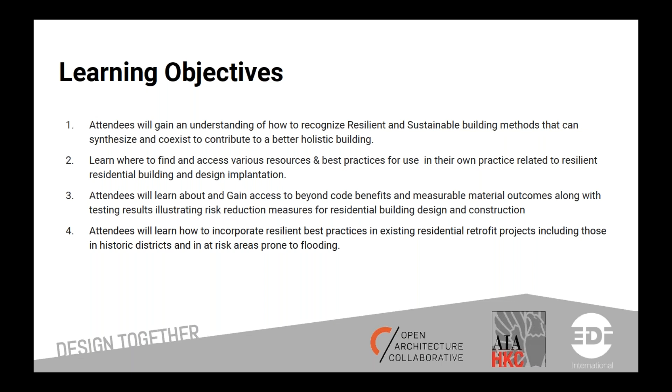Quite a resume. Today's learning objectives: attendees will gain an understanding of how to recognize resilient and sustainable building methods that can synthesize and coexist to contribute to a better holistic building. We will learn where to find and access various resources and best practices for use in their own practice related to resilient residential building and design implementation. Attendees will also learn about and gain access to beyond-code benefits and measurable material outcomes, along with testing results illustrating risk reduction measures for residential building design and construction. And attendees will learn how to incorporate resilient best practices in existing residential retrofit projects, including those in historic districts and in risk areas prone to flooding.

Being in Boston, like a lot of our cities and New York, we can all relate to this. In our course description today, architects are being asked to understand where and how to build better in the face of mass migration, population growth, resource stress, and associated risk posed by natural disasters and climate risk. The AIA and its members are at the forefront of addressing these issues, highlighted by a commitment to the New Urban Agenda that aims to provide quality housing to people and communities around the world. Here in the US, we are coming to grips with the transformation of communities and the way we build to ensure the health, safety, and welfare for all. In this webinar, Illya will take you through a series of housing projects that directly address risk through resilient adaptation and beyond-code building practices. He will introduce several relevant resources covering residential construction and retrofit to achieve resilient building design and benefits to the stakeholders.

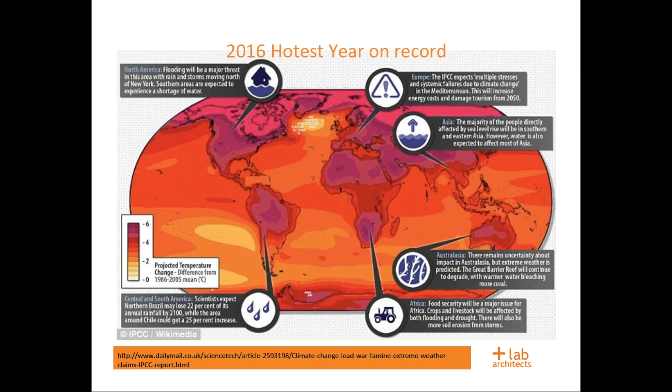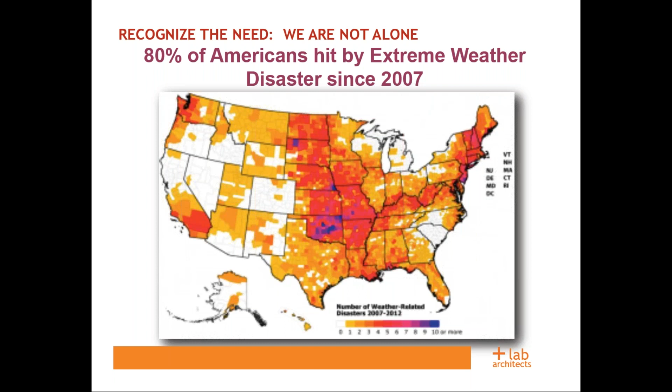So I'd like to start off with a few issues at hand. It's really important that we set the framework for what we're doing. Some of those issues are that the world is getting a lot hotter. Last year was the hottest year on record, and no doubt this year we'll probably break those records. But that means more flooding, more heat, more issues than we've ever had before. In fact, in the United States, 80% of Americans have been hit by extreme weather since 2007. And if we took a look at just last year, 2016, that was the most billion-dollar disasters in U.S. history, coming in second only to, I believe, 2011.

If we take a look at some of the other issues at hand, some of it has to do with rapid urbanization. In 2010, half the world lived in urban areas, and by 2050, 70% of folks are going to live in urban areas.

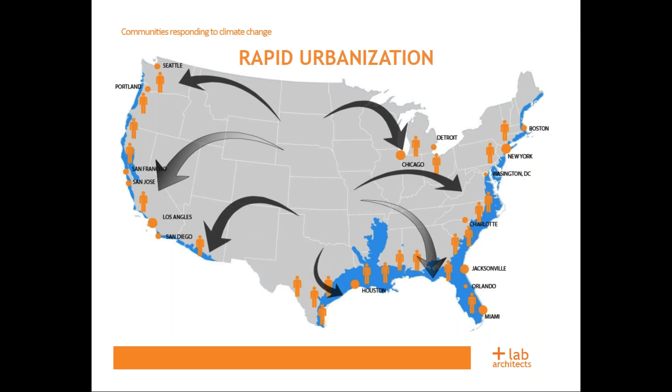That's an enormous amount of the world population, and that's only going to get worse. In fact, 3 out of every 4 jobs happen to be dependent on water globally, meaning 75% of all labor in the world is dependent on water. Too much water, too little water, sometimes we get caught up in a little bit too much.

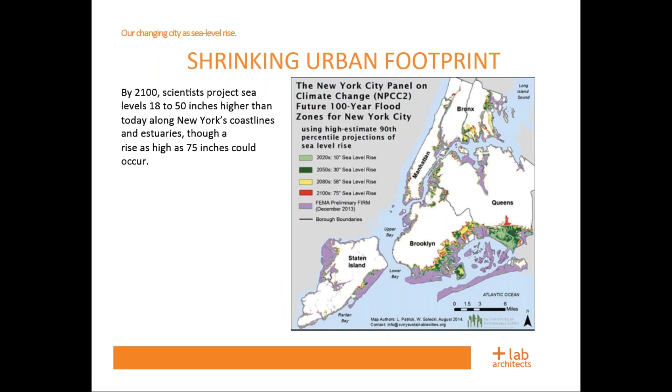With New York City, where I live in Brooklyn, a lot of the work being done is around predictions put forth by Sandy, that we're going to be looking at almost 6 feet of sea level rise over the next century, and how do you prepare for that? The fact is, over the last 30 years, the world has lost 2.5 million people to natural disasters at the cost of $4 trillion.

If we look at the year of Sandy in 2012, that year just over 61 million people were displaced worldwide from natural and man-made disasters. We hear a lot about the crisis going on around the world today with population migration. That's been happening for years and years, and it will continue to happen. In fact, every minute, 24 people are displaced around the world by natural and man-made disasters.

What we really need to do is project forward to the years 2050 and 2100 and ask ourselves what the future will hold. If we take a look at global migration and growth of cities combined, there's an estimated 200 million people in need by 2050 on an annual basis. Looking forward to 2100, that estimate goes up to 550 million people on an annual basis being displaced by natural and man-made disasters.

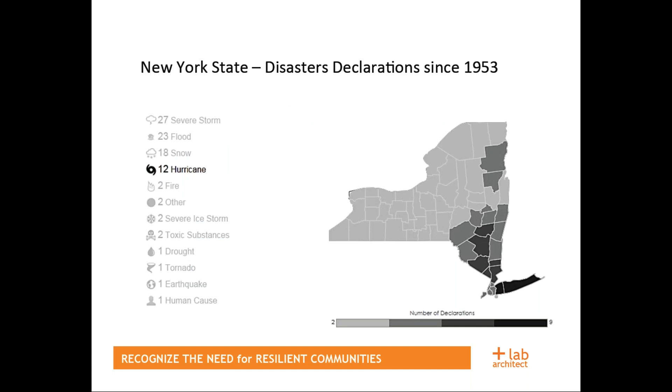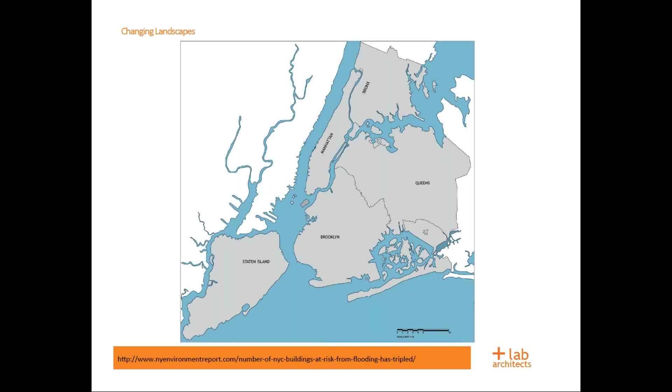Now, if we look at New York City proper, the 5 boroughs, we look at our current coastline but project forward to 2100. If you look at that erosion of coastline based on daily flooding as well as sea level rise, that equates to about 12 square miles of land lost. This is a highly dense urban environment, similar to Boston and all of the cities along the coast, Miami, all of these places.

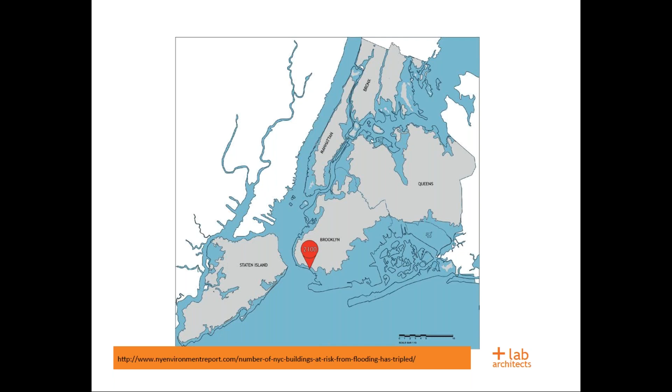So what does 12 square miles mean for New York City? It means about 400,000 people who currently live there can no longer live in those locations, or we're going to have to do a lot of extreme work to keep them there. Aside from those 400,000 folks, that area of land turns out to be quite a large chunk of the city if you gather it together and remove it from the geography at play.

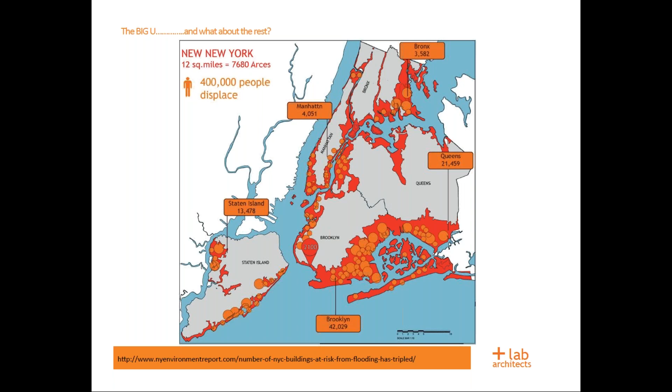As a side note, 51 square miles of New York City, the 5 boroughs, was hit by Hurricane Sandy. So we've seen this before, we've seen it even worse. But this is on a daily basis based on climate change numbers.

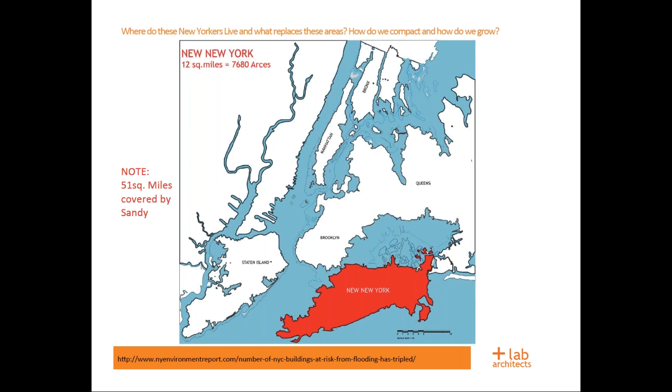It's 12 square miles, and within those 12 square miles, aside from those 400,000 residents, it includes 80 schools, 74 daycare centers, 28 public housing buildings that house 61,000 people alone, other residential facilities with social services, 18 hospitals, 9 senior centers, and 4 wastewater treatment plants.

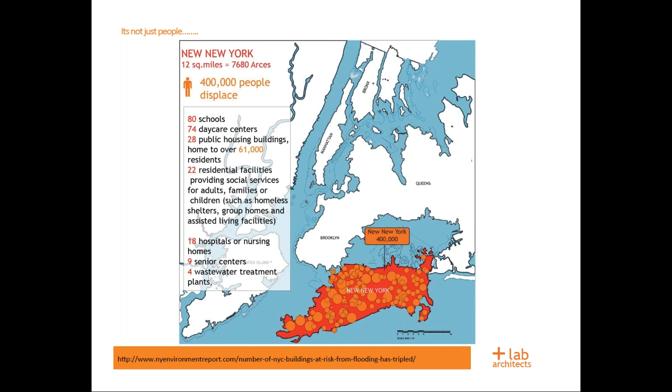So we are talking about housing today, but we're also talking about everything that supports the infrastructure of what makes a community and housing work in those locations, and with the new urban agenda, a walkable city.

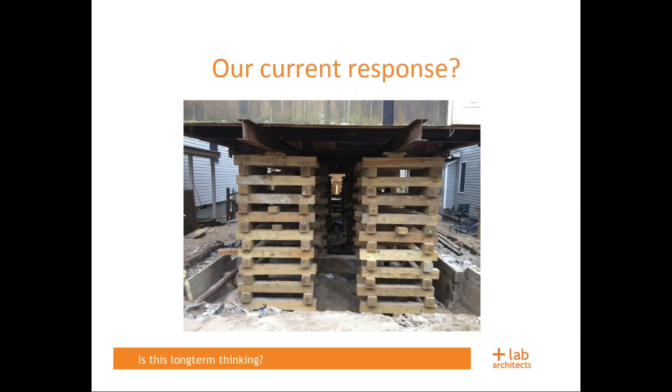So is this our current response? This is what we're at now. Does this look like long-term thinking? We need to recognize a couple of things, the consequences of uncoordinated action. When I'm working on a house, I need to really understand what the neighbors are doing, what's happening with the entire community altogether.

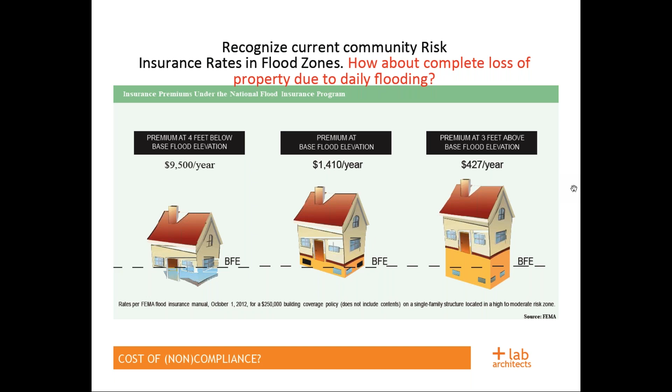If you look at the rates of insurance, this is what's happening all across the Northeast, in fact all across the country. If you look at this diagram, this is based on a $250,000 home. If you do nothing and you're considered in a flood zone, you're looking at almost $10,000 a year in insurance. If you do minimum compliance, to the BFE or base flood elevation, you're at $1,400 a year—a stark contrast. If you take the recommendations of Freeboard and go to a design flood elevation, which is much higher, your insurance drops really, really far.

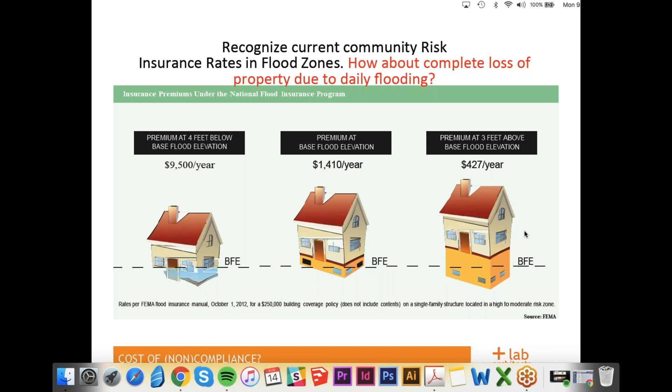Now, a lot of people can't get to compliance, and that's some of the issues we have. What we see are resilient communities. So how do we get to this idea of resilient communities with housing at the core?

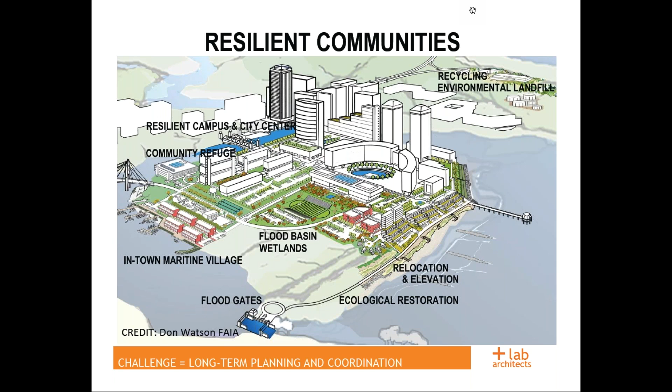If we think about a layered approach, we need to recognize that resilience is health, safety, and welfare as architects, but the holistic building approach tells us that building resilient and sustainable together can coincide, though they are quite different in some cases. Sustainability looks at long, slow change in environmental alignment, while resilience is sometimes based on redundant systems and trying to become risk averse, not aligning with the environment—it's really environmentally defensive. But there are many instances we'll go through in case studies.

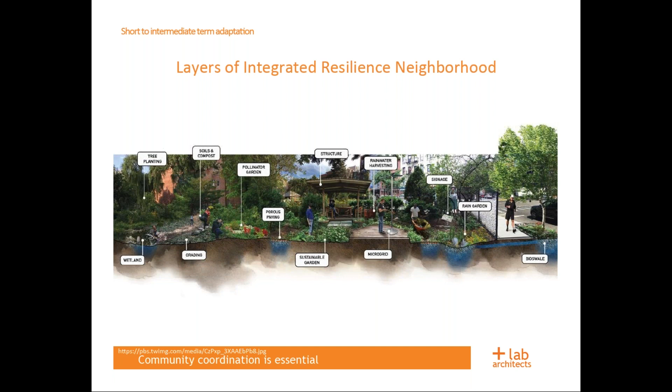If we take another approach, this idea of layers starts well outside your building—your buildings and grounds, bioswales, rain gardens—how do you manage what's going on to keep a cooler environment during extreme heat, or taking care of water when there's too much or too little?

Now we get to this idea of whole buildings. I'm going to give you a series of diagrams that lead into three case studies. The first is whole buildings or new buildings in Zone A, which is a floodway or designated flood zone.

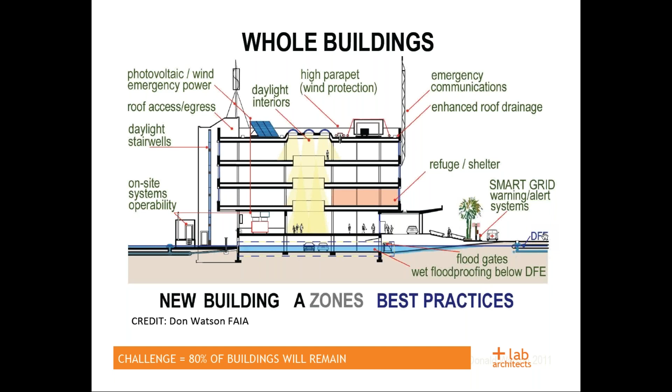But the challenge, as stated on the slide, is that 80% of our buildings will remain by 2030 and beyond to 2050. So it's really about the next slide, retrofit strategies. How do you address those 80% of buildings? This is a holistic approach to mitigation strategies. A lot of the things in this slide are the same as the prior one, but the challenge is meeting the new energy code and other issues while making buildings much more robust, anchoring and securing areas of buildings that are perhaps well beyond in years.

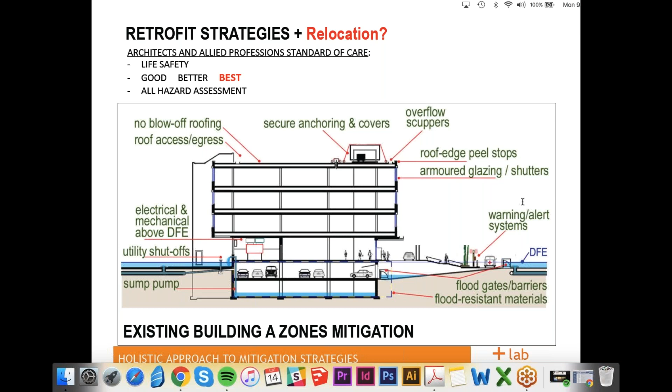That brings us to our first study: a historic West Village townhouse retrofit. Here's its location in Manhattan, for those not familiar with the area. This historic district is low-rise. Here's the facade of the building, traditionally a three-family structure with 4 stories above and 1 story below, or a cellar.

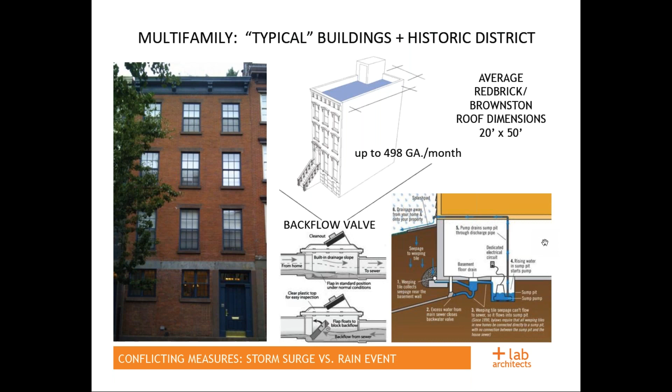Some of the issues you run into with these buildings are how to make them holistically safe and secure. Part of what we have to contend with in these historic buildings is that we can no longer directly put rainwater into the sewers because the system is overloaded in New York City. So you have to protect from backflow from the sewer but also hold on to your water. In a lot of these cases we've had to use sumps and pumps, overflow, and check valves, but also find a way to hold water until you can later release it. This is very difficult in these small footprint buildings.

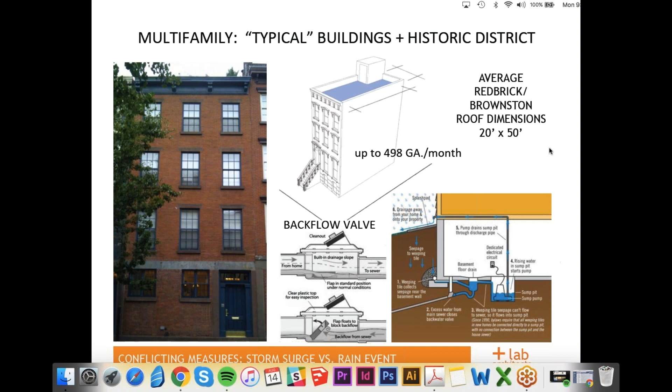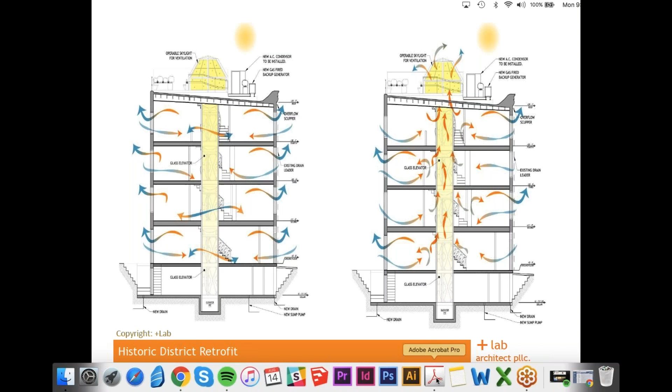Some of the strategies we take on are how to turn these buildings into much more passively survivable structures, increasing the insulation value from the inside out, but also changing the interior footprint. In this case, we sank an elevator shaft down the center, which is used as a core ventilation into a skylight. The skylight allows a chimney effect to vent, but also passively heats the upper portion of the building and redistributes that air to other parts of the building.

We've also added a backup gas-powered generator on the rooftop. Natural gas fared very well in Hurricane Sandy, and this unit, shown here on the roof, is jacketed against flying debris, with all connections and services hardened as well. We hope we never have to bring it online and use it.

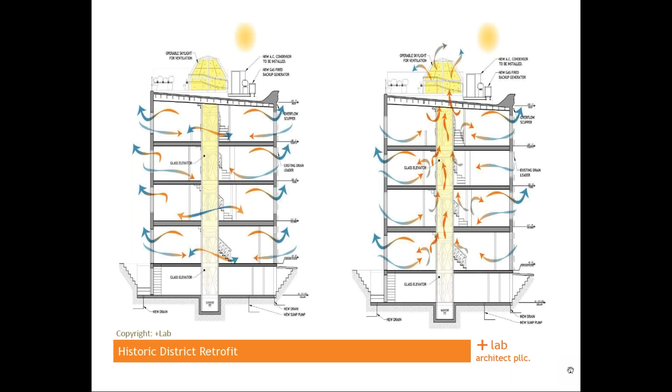The last slide for this project looks at pieces you need to consider in any historic district. First and foremost, we added new impact-resistant windows that also increased thermal performance and operability for passive measures. We also found windows with a high STC value, creating much more comfort on the street side given the heavy traffic that goes through this area of town.

In addition, we expanded the stair bulkhead to include relocation of mechanical equipment and the generator to the roof, as well as in the cellar, which you can see is a lower flood area. We elevated the other equipment so that if there is water beyond the holding tank capacity, there is yet another layer of redundancy, safety, and security within the building.

If, as sea level rises, this building becomes more vulnerable, the next stage would be the access to the cellar itself. It could be built up on the street side with water barriers that actually happen to be fixed planters.

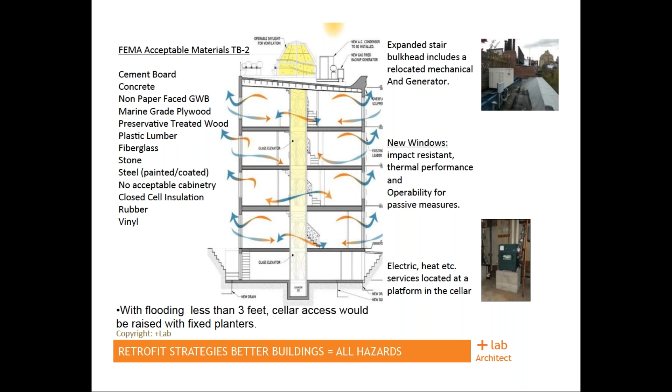What I've also listed on this slide is one of the resources available to you: FEMA's acceptable materials for flooded areas. There's a whole list of these, and many more. So take a look at Technical Bulletin 2 when you're looking at retrofits and rebuilding areas.

The other opportunity out there is that we need to recognize that by 2030, 900 billion square feet of new and rebuilt buildings will be constructed in cities around the world. That happens to be 3.5 times the entire building stock in the U.S. currently. So the takeaway is that every one of you listening has the opportunity to change this conversation, to make things more resilient and sustainable, moving the world in the right direction, city or project by project.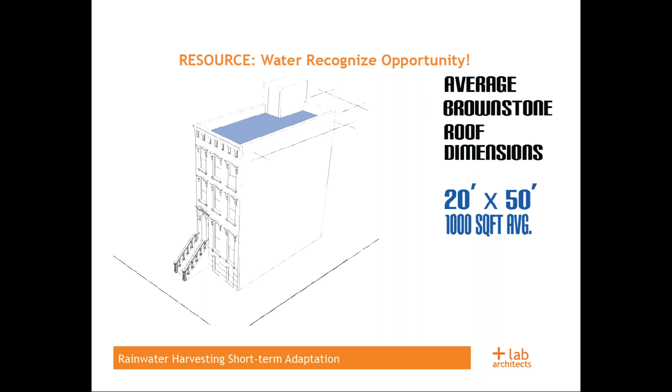Here's one piece that we did implement on the structure I showed you in the West Village: how do you take care of water in a positive way? We recognized this as an opportunity. If you take a look at New York City, a 20 by 50 footprint of the building gives you a great opportunity to gather almost 6,000 gallons of water per year, nearly 500 gallons per month. That's including some waste and non-captured water, but it gives you an idea of what you can do with that.

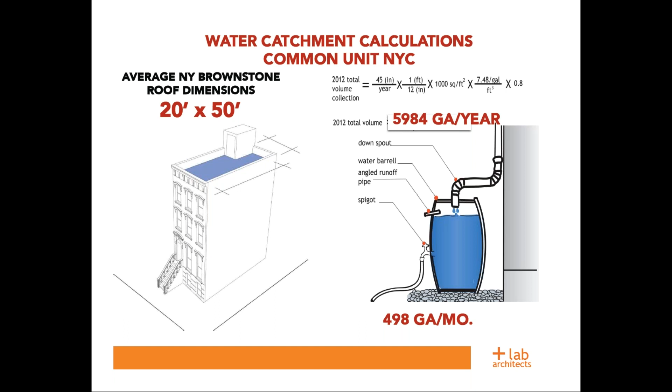There happens to be a community garden in the back of this house that was contributed to. So how do you take that onto a larger community impact of 10, 20, 50 homes? You're solving some of the larger problems of the world.

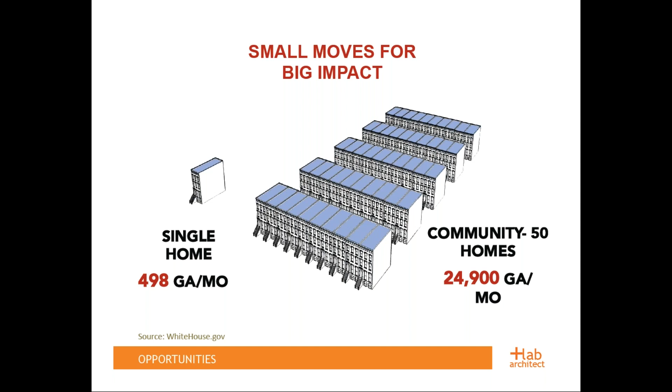So case study 2, I'm going to take you out to the Rockaways, or Breezy Point. This is a little bungalow. You can see this peninsula of the Rockaways is only a few feet above flood elevation. By the insurance flood map, you can see that this is inundation territory.

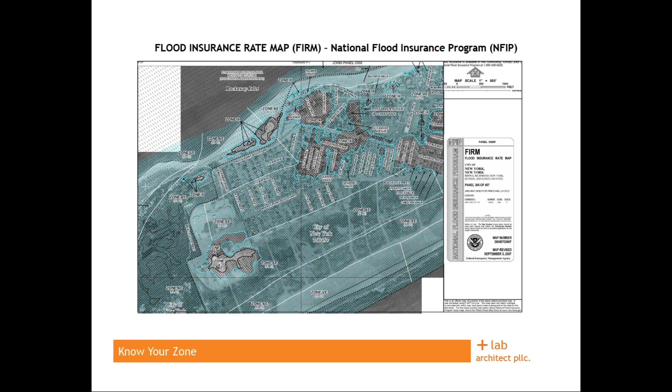The first piece of information we're going to use is the Retrofitting Buildings for Flood Risk guide put together by the Department of City Planning. This has all scales of housing, from the bungalow all the way to multifamily. Within that, I'm showing you two pages on this next slide just for the bungalow, with some of the requirements, but also what's available to the homeowner to keep them safe and secure for many years to come.

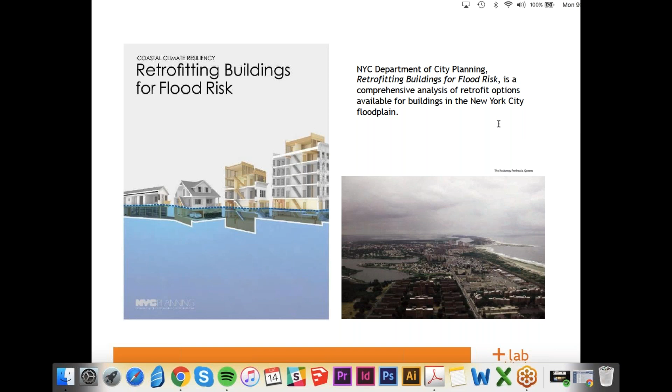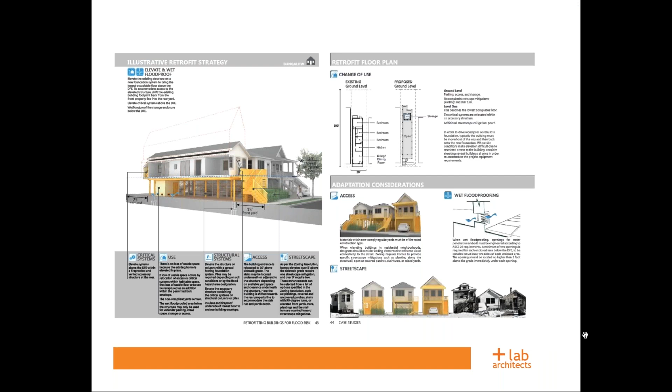The next slide shows the west elevation. This is our demonstration plan. That red line running through there is the freeboard requirement. The design flood elevation is what's required by your flood maps, and the city should be putting out information, or you can find it through FEMA. Then a freeboard is added to that, for projected sea level rise, wave action, whatever it may be. In New York City, it's generally 2 feet. So that red line shows you where the finished floor should finish above that line.

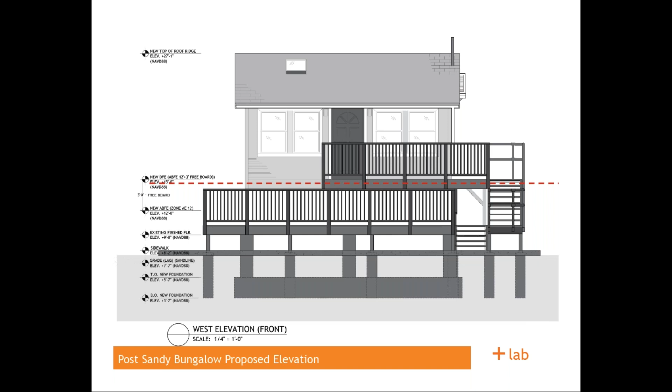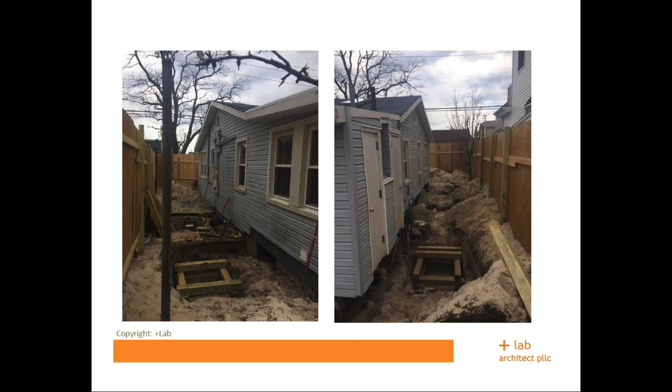And then there's several shots of the crew lifting the house. We hadn't done any lifts as an architecture firm before. I'd seen them on occasion, but what you're going to see is that cribbing and new ways of lifting—many of you listening might have experience with this.

But the city of New York didn't have a lot of this. In fact, a cribbing drawing was required by architects, which you can see here. This cribbing drawing is something we had never done before, and the city hadn't seen it either. So our cribbing drawing became part of what the city has used on occasion as an example.

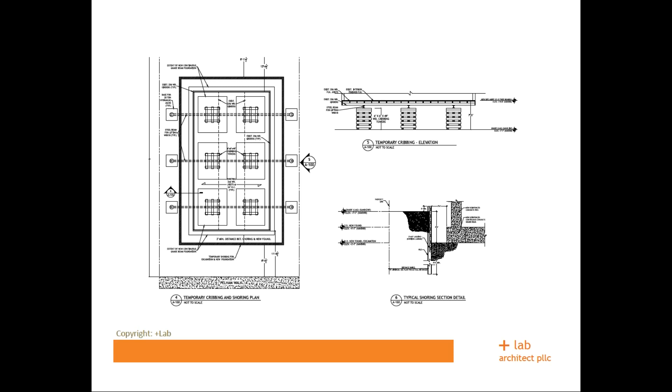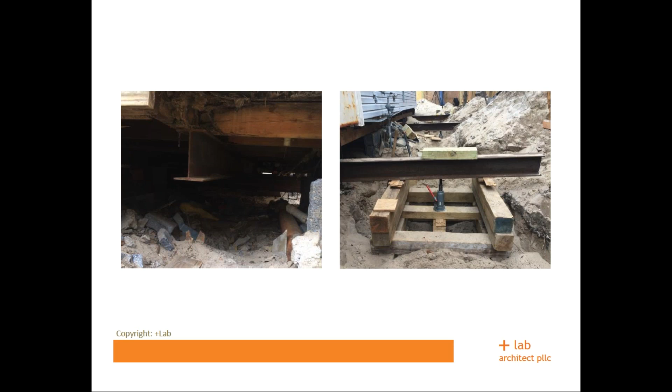Typical cribbing for lifting these little houses uses steel and jacks, and this little hand crank jack, oddly enough, does the job for this small house. As this thing gets elevated piece by piece, you can see this next group of guys digging out the foundation.

Concrete reinforced grade beam that elevates the house with concrete reinforced piles. And this thing goes up in the air, very much like our original drawings.

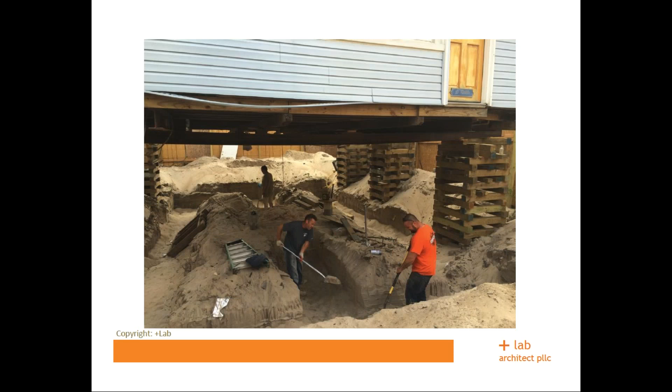The next slide shows the elevation of the house, and here's a couple of technical bulletins you should be aware of. When you're doing house lifts, it's not just lifting the house—all the utilities that come up into the house need to be made resilient to waterborne and flying debris. There's guidance for that in the FEMA document, Protecting Building Utilities from Flood Damage, with some details provided.

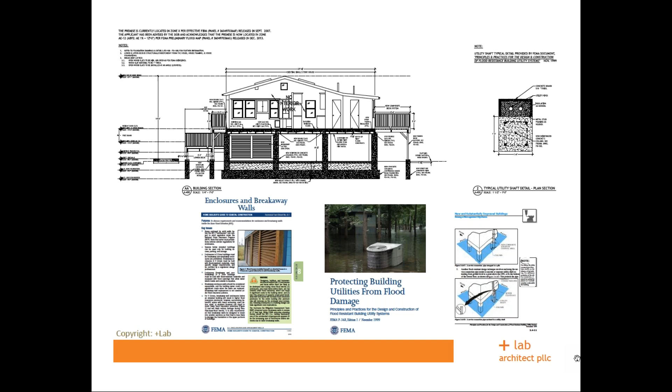And then, of course, the enclosures. Once you've elevated the house, depending on how high it is, you have to make some sort of breakaway enclosures that allow water to come through, but also, if hit by debris, don't put unnecessary forces onto the new structural system. So this is a good resource slide that we'll share out with you.

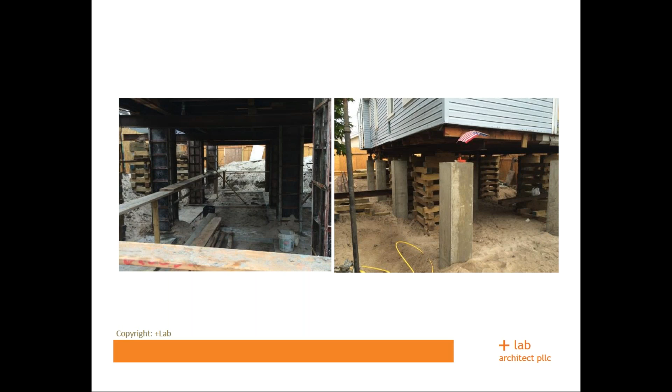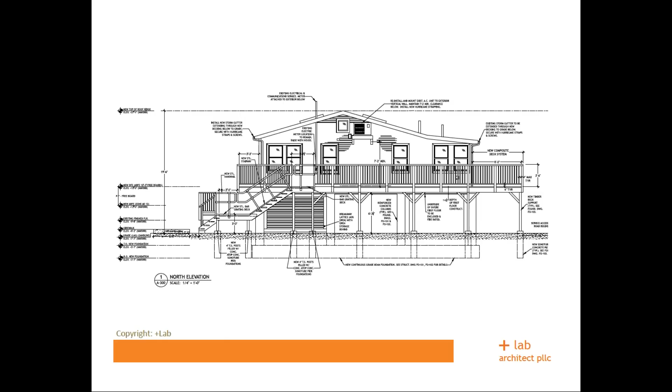The next slide just confirms, as the house went up, finishing it with the columns, and then we'll show you the last two slides showing the front and rear of the house. I did want to mention that because these are tight lots, there's a need for non-combustible stairs, so you'll see that in the vocabulary in a lot of these neighborhoods. These last couple of slides show how we've mitigated the front of the house to the walkway, so it still has a humanistic feel, while the rear of the house is elevated like a deck.

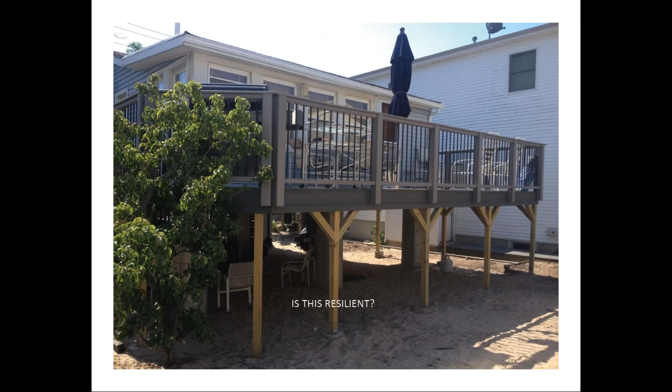But I've got to ask, is this resilient? Because in my mind, it's not. I've elevated a home that does not meet current code standards, energy standards, or any standards whatsoever. We did not replace windows. We did not verify continuous load path. What we were required to do is lift the house and get its services together. So if the next storm comes, I don't expect the top of this house to fare any better in a windstorm than it did in the water storm.

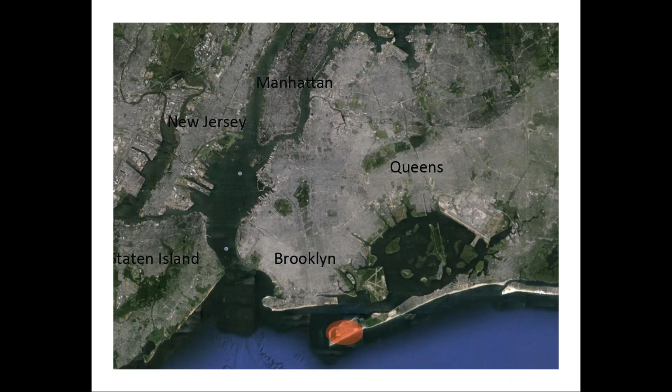That's unfortunate. Case study 3, moving on to new construction. New construction happens to be probably the easiest thing you're going to look at in any of these places. And again, we are back in the same neighborhood.

This is on the Rockaway Peninsula, and many of the houses were taken down after Sandy—they just weren't savable. So this is one of the houses, and if we zoom in a little closer to Breezy Point in this neighborhood, we can look at some of the pieces of information we used to design this house.

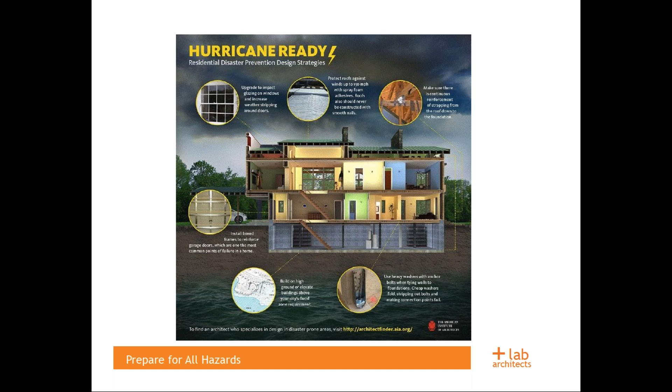Some of the hurricane-ready information you'll find is from the American Institute of Architects, from Hurricane Strong, which is from the Federal Alliance for Safe Homes, and some of the information we presented in the first project from the New York City Department of City Planning. So let's take a look at some of these resources.

On to the next slide. Here's Hurricane Ready, that's from the AIA. The next slide is the Resilient Design Guide from the Federal Alliance for Safe Homes. And then the next one, which is quite important, is the Fortified Home Standard from IBHS. This Fortified Home Standard is something important when you look at the business case for resilience.

IBHS does a lot of material testing, and in fact, when you take a look at your hurricane-rated doors, impact-resistant windows, whatever they may be, they've gone through a testing program, usually through IBHS. This fortified standard brings a lot of those together in building methodology that will ensure the house is much more safe and secure. But the best thing is, if you follow these standards, which are beyond code, the insurance rates for your buildings and the end user drop substantially.

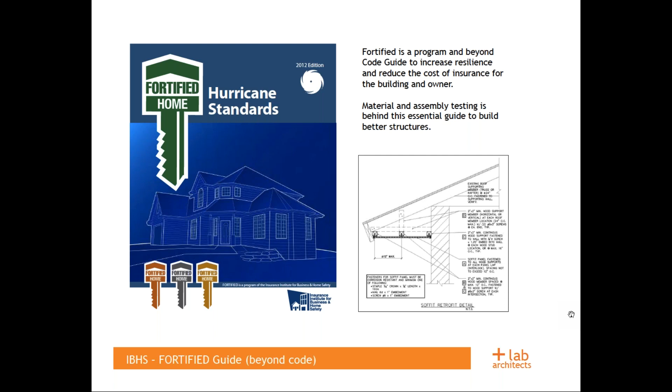So we are going to be using the Federal Alliance of Safe Homes recommendations that we had shown you, the elements of the AIA, and the fortified standard here, along with some of the best practices out there for this case study. So here is, the next slide shows you

What the house looked like beforehand. Again, this is a bungalow area, but this is a much larger home that was developed by the owner's father. The owner's father was an engineer, and so this building was actually fairly well built. Its structure was intact, and this building survived Sandy. It was inundated, so it lost a lot of its equipment and whatnot, and it wasn't going to be torn down, but upon further investigation, some of the underlying structural beams had cracked over time, and they decided, based on the age of the house and then what was left, to take it down.

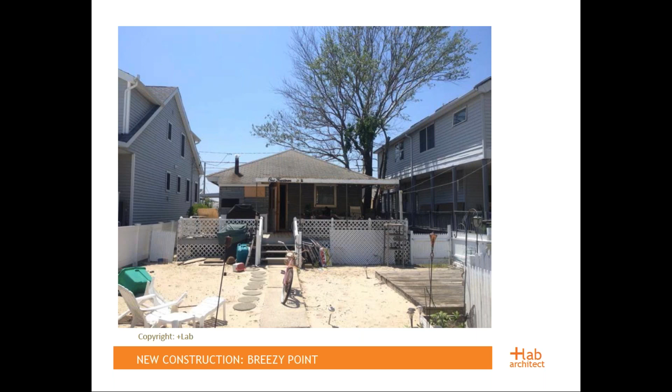The next shot is the rear of the house. You can see that this was one of the original bungalows or smaller homes, about, as I said, I think 1,100 square feet. And the houses around it over the years have been developed into much larger structures. You can also see these are all tight neighborhoods that you see in a lot of our cities around the U.S.

What we decided to do for this house is bring in a lot of the industry partners, as well as use all of those recommendations to put together a home that demonstrates resilience and sustainability, how it can be attained by the common homeowner, along with using methods that are not so foreign to the general contractor. So there's a coalition that was formed with Portland Cement Association, BASF, Federal Alliance of Safe Homes, Engineered Woods from Huber, and NJIT has come on board to help us out as well.

And we designed this home, if you look at the next slide, to answer a lot of issues. So this is a resilient, sustainable home. That's our primary concern, is to give the homeowner something that she will feel much safer in. It's beyond code. It's prepared for extreme heat, cold, wind, water. Also has lightning protection. It's protected against flying and water-borne debris to a great degree. And some of the aspects of its construction, it's insulated concrete formwork construction.

I'll show you shortly in some slides. It also has Hardie plank on the exterior envelope, but also concrete roofing tile, which give it an impact resistance along the entire envelope that make it worthy of hurricane force winds and flying debris. The windows and doors are also impact rated for hurricanes, as I mentioned, to have lightning protection. Resilient materials and finishes, as I mentioned, the very first project under FEMA Technical Bulletin number 2, the whole list of materials, anything that is underneath the floodway is finished in that manner. So it's easy to clean up, mold resistant, and no problems will happen in the future.

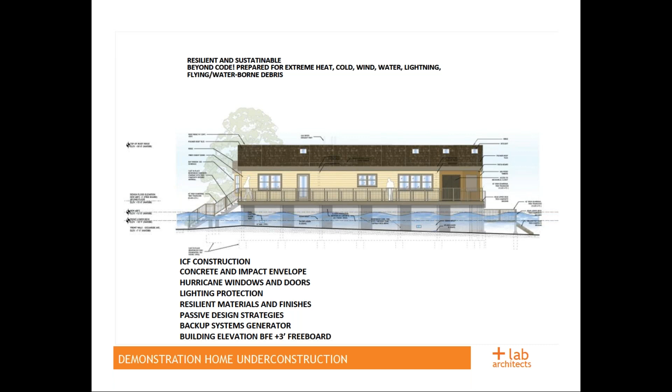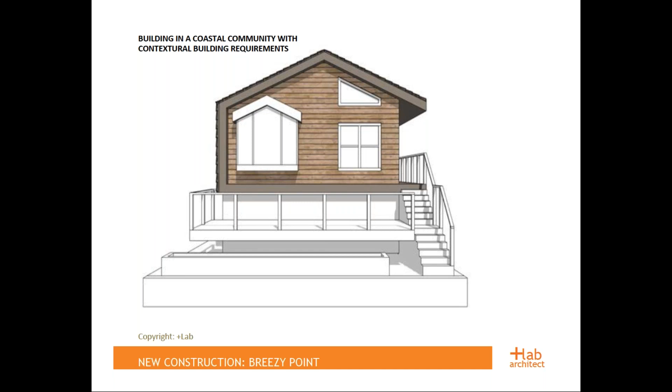So if we take a look at the next slide, this is just a brief piece. All of those things I mentioned have to be done in a contextual zoning and contextual building requirement based on the Breezy Point Cooperative. So this house cannot look so dissimilar from the houses that have existed there for the last 50 to 100 years. So how do we do that? Well, luckily there's a lot of good products out there that make that happen, but if you take a look at these next few slides, we just look at the ICF construction.

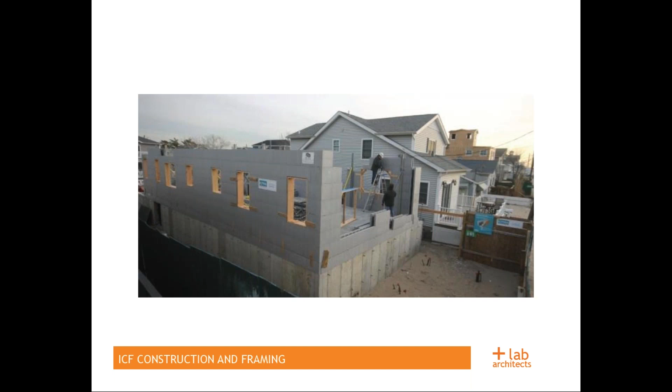So the insulated concrete formwork gives us a great deal of R value, but also impact resistance. It also stops any noise transmission, which was also a concern on the front end of the street, as well as the passive ability of the heating and cooling of this house.

The next slide shows you how this product or methodology is put into place. For those of you that do larger buildings, this isn't so dissimilar to what you've done in the past, and maybe a lot of you have used ICF. ICF answers the 80 by 50 requirement, or the energy requirement we're all going to need to answer, because this is going to be a very low energy using home for heating, cooling, lighting. All of those passive pieces are in there, and it's due to this material.

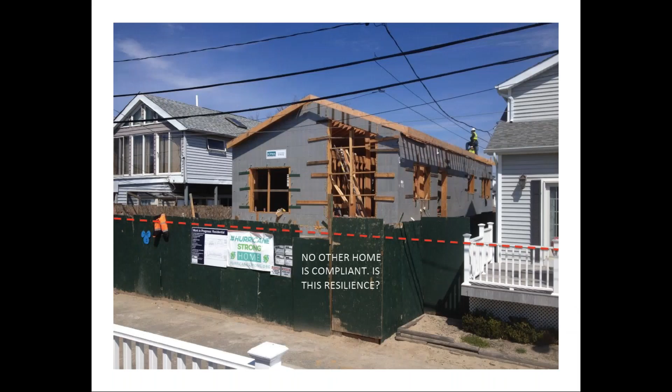Then on to the next slide. This is starting to show the house in a more complete way. What I'm showing you with the red line is Diane's house is elevated 3 feet above the required elevation for a design flood elevation. All of the things that we're doing also lower her insurance, but also increase her ability to withstand shocks and stresses of all of the things that we've listed prior to this slide.

But if you take a look in the neighborhood, none of the rest of the homes, as far as the eye could see, are in compliance. So that puts a real stress on this neighborhood. She will be the last house standing if another storm comes in. We don't want that to happen.

We want this information to get out to a lot of practitioners. So here's the challenge: it's education of all parties, not just the architects here listening. Many of you know how to do this already. Sustainable, resilient homes—how do you pull that together, and how do you convince communities and contractors who've never built in this methodology before, or only have built in this methodology once or twice?

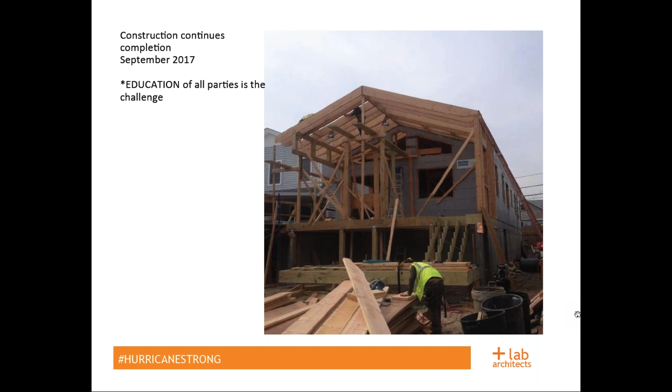So this house is due to be complete in the next month or so, so stay tuned. If you log on to Federal Alliance for Safe Homes, it's a not-for-profit organization. They've set up a camera so you can see the Hurricane Strong home being built on a daily basis, and log in. We're going to be releasing all the information for this house as open source—plans, drawings, specifications, you name it—because we want the word to get out there.

So this brings us to the resources for the design professional. Some of those I've salt and peppered throughout this entire presentation. That information is all free and downloadable as PDFs. You can find it where you need to go.

But if we move on to the first piece, here's a few steps for coastal design. Now, a lot of you listening may not be at the coast, but if you're in a riverine area or floodway, it doesn't change. So one, you need to assess your risks, all hazards. Even if you're not in a zone with a lot of flooding, is it extreme heat, is it extreme cold, what is it? Is it an earthquake zone?

You also have to know what those zones mean and find your flood elevation through the FEMA website that has all of the mapped flooding areas in the United States. They're updated, and you should check with your floodplain manager. You need to calculate your base flood elevation and know the topography and what is surrounding your site and building to make sure that flying debris or other developments may increase your flooding or other hazards for wind-borne debris.

In our case, we've been adding our 2 feet of freeboard as a minimum, and then, of course, advocating to go higher if that's available to us through the owner or the city. When you add that, you arrive at your design flood elevation.

Then what you need to do as an architect is project into the future. You need to understand what the best data is for what's going to happen with that client, his or her needs, over the course of, if it's their 30-year mortgage, then what is climate change in the next 30 years for the area you're designing? That is your ethical responsibility. But if this is a multi-generational house, if this is going to go future, or is it an investment, how do you project forward and how does that become part of the return on investment?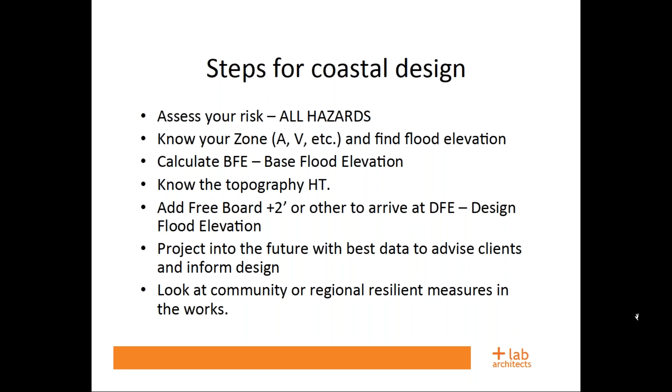So the next slide shows you some things that are already here. If you're in a state that's already adopted the latest code, the residential code already has a lot of these measures baked into what you need to do. But if you move to the already modified code for ASCE 24, you already have to have a 2-foot freeboard in VE zones. Your lowest floor is already stated where it needs to be. With healthcare facilities and residential buildings above 5 stories, there's already guidance that's made its way into the code, so it's no longer guidance, it's actually code.

So being aware that this round of code compliance has added some resilient measures, the next one will add even more. So when I say beyond code, you're ahead of the curve because you'll have to do it eventually.

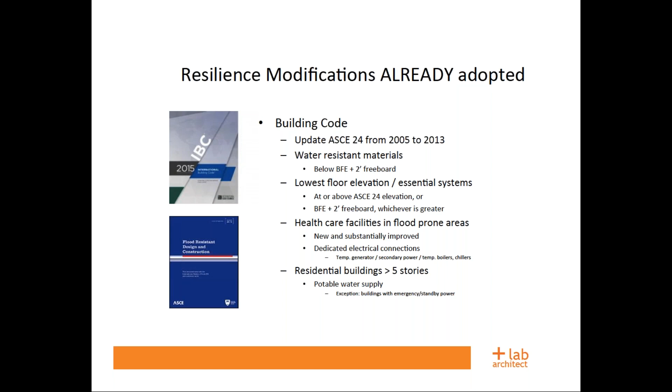The next piece of information you may want to bring to your own community is the CRS, Community Rating System. This is a community-wide effort. If you're in a small town, this makes a lot of sense. If folks sign on to this and the community begins to do comprehensive measures, and some of these are very easy to begin with, your flood premiums and insurance rates community-wide drop 5% for every point you have. So you can come down to a 45% discount for a community.

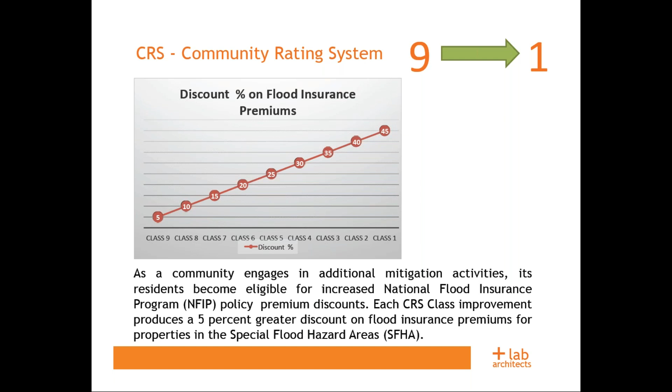So if I look at that in terms of development for the future of my community, and I can roll that into return on investment by reducing my risk and taking that money from the community and looking at what could be better, it's a pretty good program.

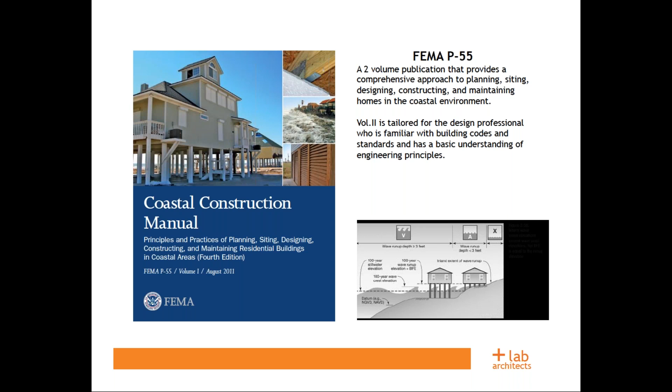Then there's a whole list of FEMA manuals. I'm not going to spend a lot of time on these. There's an entire suite of FEMA manuals that we've built a lot of these houses to the standard of, or used. This is the FEMA P-55 Coastal Construction Manual. FEMA also runs a course on this, but it gives you all the base information. If you are building in a coastal zone, which many of you are, this is your go-to for single and low-rise multifamily homes.

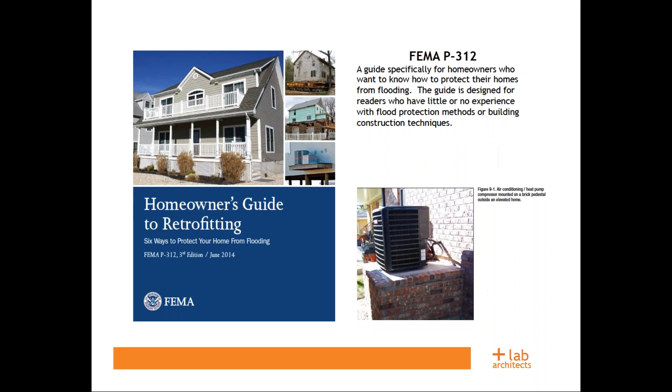The next one is the Homeowner's Guide for Retrofit. Since we're using a lot of existing building stock, you will need to understand where to find this information and also pass it along to your clients, colleagues, and other homeowners. This gives you a lot of great information on what can be done with existing structures.

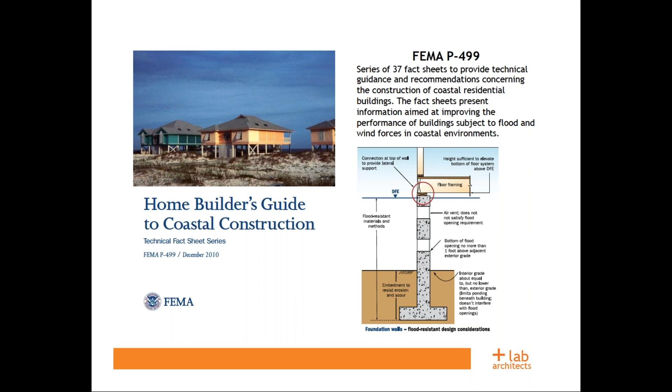The next one is the Home Builder's Guide to Coastal Construction. This really shows you how to elevate a house, and has very detailed sections and structural elements that provide technical guidance and recommendations all about the construction of these homes and buildings within floodways.

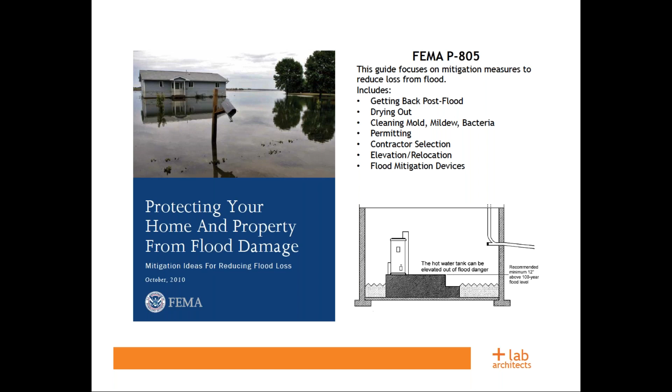The next one is the P-805. This is Protecting Your Home and Property from Flood Damage. This gives you even additional information about how to dry out, cleaning for mold, permitting, contracting, and selecting. So if a disaster does hit, this gives you a lot of information on how to get up and moving again for your community, but also as a design leader.

If you want to do buildings that have funding from that side, you still need to know these things.

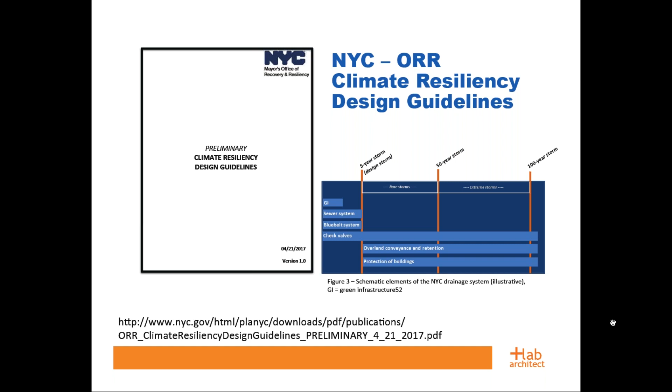And then, of course, there are studies and testing. If you're interested in flood proofing in coastal zones, this is put together by David Perkes, and there are 12 types of flood proofing for foundation and underground conditions that have already been proofed out. Most of this is in the Southeastern Compact of, I believe, 8 states that have adopted this, but we've introduced it here in New York City and used some of this methodology when flood proofing below ground.

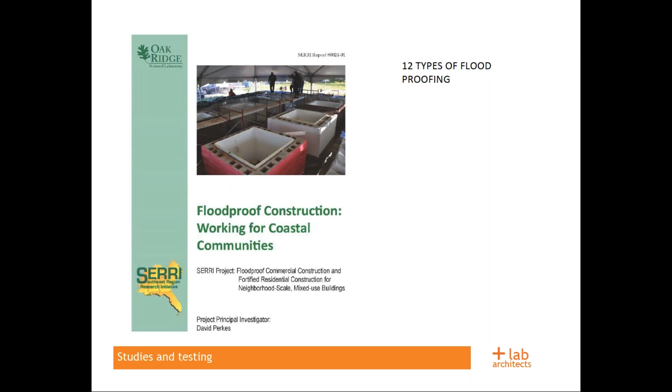That brings us to the close of what I have to tell you today about these three projects. I did speed through them very quickly, but I wanted everyone to get a sense of these three scales. There's a lot more to be had in the governance and guidance that I put out there for you, and I thank you very much. If you need to contact me, I'm always happy to answer any questions via email or otherwise. Thank you.